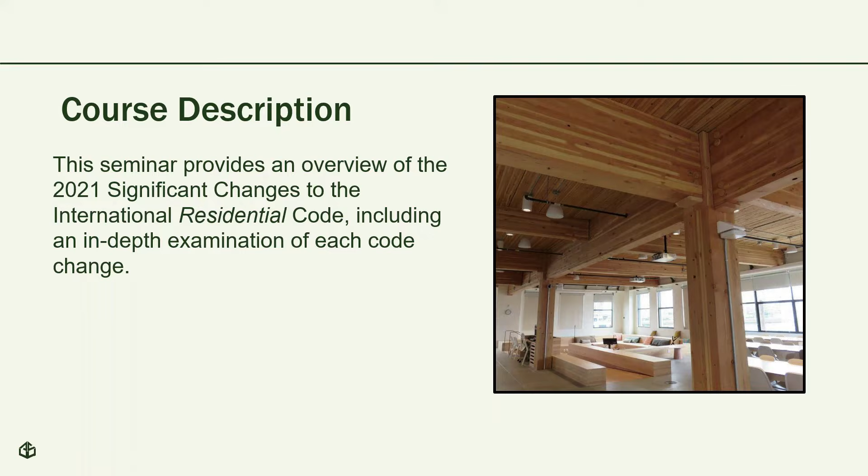Here are the objectives for today. We're going to identify the differences between the 2018 edition of the IRC and what is in front of us for the 2021 edition. I'll try to explain new code concepts, give some of the background, give some of the reason statements for why these code changes were necessary to pop into the International Residential Code. And we're going to summarize certainly the application and impact of these revisions, not the least of which will be those that revolve around the enforcement of this code.

As you saw in my background, I have had the opportunity to enforce the code from time to time, and these particular issues do pop up, and they need to be addressed in the model code. If not, then we have to address them by local adoption. So we have these particular objectives.

Again, the best education opportunity really that we have is to participate in the code development process. You have all of the experts, and there are people that believe they're experts also, in one room at one time, discussing, debating, arguing over various code changes, various ideas that people think need to be in the codes, most of which, frankly, don't make it into the codes themselves.

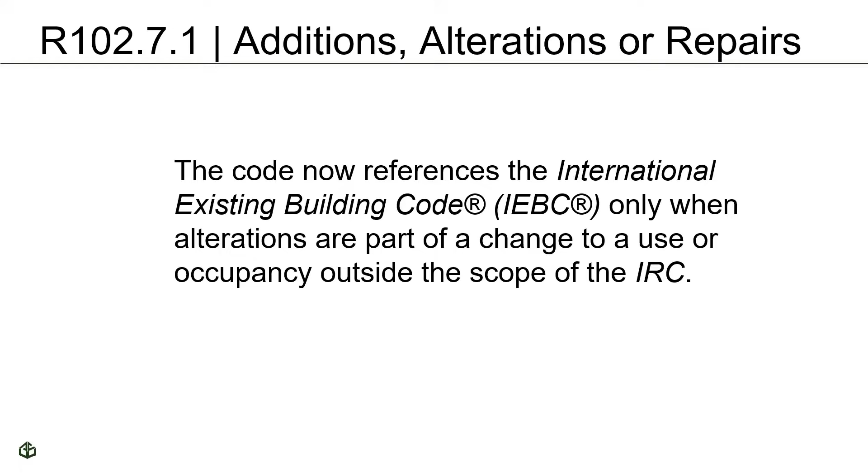We are starting to see in other parts of the country much more use of the IEBC, including now in California. We're going to start to use not just the prescriptive method that's found in that document, but we're going to be able to use the work area method as it will be transcribed into the California version of the IEBC. So this document is gaining more acceptance, and we're moving ahead with the use of that, as well as the IRC.

We made a big jump. We did not include Chapter 2 in this, all of the definitions. There are a number of new definitions that you need to review. We just didn't feel that they were as significant, perhaps, as other types of code changes given the time frame that we have. Chapter 2 is our dictionary, it's our glossary, it's the language we speak.

And we need to understand those terms and use them appropriately so that we can communicate about the projects that we have either under design, that we're reviewing, or if you happen to be a builder, that you're constructing. So you need to understand all of those. Again, you can find at least those that were identified as significant by ICC staff and others in that workbook for the significant changes for the IRC.

This move up to Chapter 3 is a very interesting one. I was a committee member on the residential committee for this one. And actually, a friend of mine submitted this code change on behalf of, I think it was the LA Basin chapter of ICC, to bring in the potential use of shipping containers for residential projects.

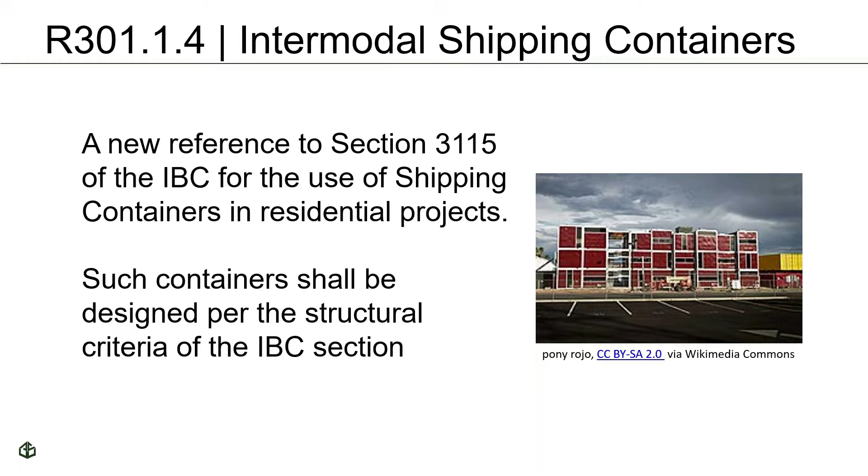Keeping along in section R301, our structural loading criteria for the residential code, we have prescriptive criteria in this section allowing us to use the prescriptive criteria in chapters 4, 5, 6, and so on, describing the various structural elements. When I was the original drafting secretariat for the 2000 edition, we envisioned this criteria in the residential code would be for flat lots, very simple rectangular floor plates, with lots of redundancy in the brace wall panels and brace wall lines.

We've since moved away from that very simplistic approach and included many other conditions so we can use the IRC in these areas. In this case, we're getting into hillside settings. These hillside settings have conditions that allow us to use the prescriptive criteria in setting up the structural framing and support of these projects using the residential code's prescriptive criteria.

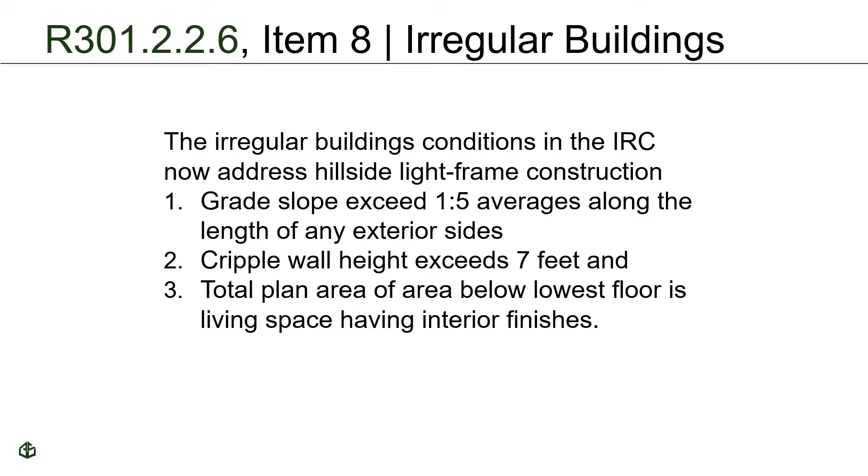We've built in, since the original residential code, many other options—a much more flexible criteria for the use of the residential code, rather than having to find a registered design professional to run structural calculations and prepare structural framing plans. So we have that now. We can use this code in many more conditions, especially since new construction is moving out of the basic flat lot areas. In order to build new dwellings, we're having to move into these hillside areas. So this addresses that.

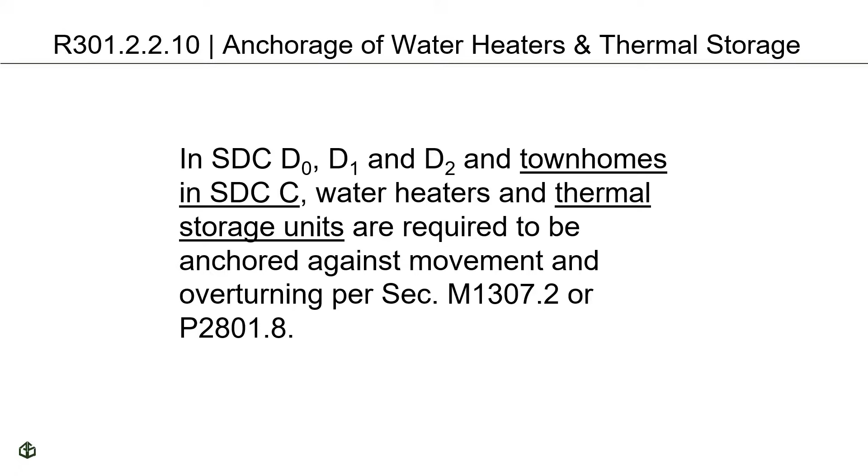We needed to provide a little bit more clarity to the horizontal continuity of the common walls, if you will, between each townhouse unit. In the code, we have to say, and I didn't really think this was necessarily a problem out there, but people pointed out that the code did not say exactly how we would have that horizontal extension or continuity provided when we have non-solid exterior walls, which are probably the bulk of the construction out there for townhouse construction.

So we now say, as a general rule, that these townhouse common walls have to extend to the inside of the exterior sheathing of the exterior wall. So it extends through the concealed space of these walls that are not solid.

We're trying to cut off any potential for fire to leapfrog or just move around these walls to gain access to adjacent dwellings, right? And so we've provided this.

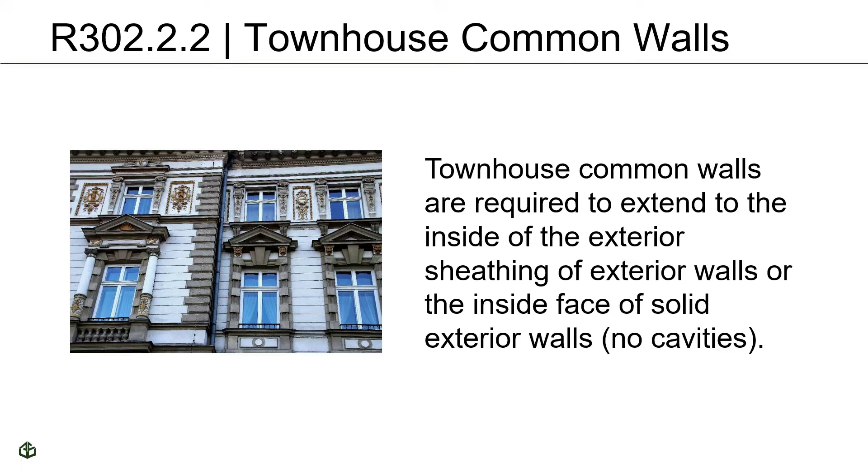With that being said, we provided another exception. Again, I wasn't sure that this was needed, because I kind of believed that when we have this kind of condition, that if you filled that cavity between the common wall and the inside of the exterior sheathing of the exterior wall, if you filled it with, they use the term blocking...

Technically, I don't know that that's exactly the right term, but they fill it completely with solid wood or whatever the fire blocking material happens to be in that concealed space. So we can then end, from a horizontal continuity standpoint, these common walls at the inside of the exterior wall. We don't have to extend them to the inside face of the exterior sheathing of the exterior wall itself.

Very fine detail. We needed to provide that again to meet that goal of completely separating these townhouse units that people live in.

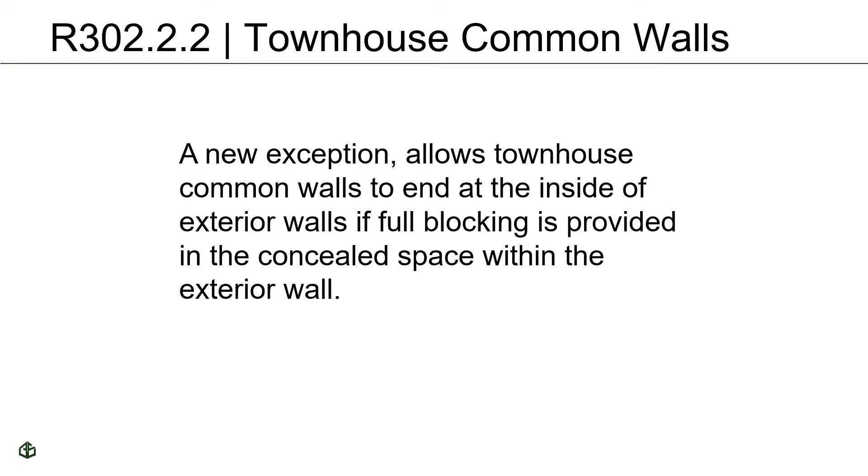This kind of code change tells me, certainly, that we have a pretty good code, actually, in terms of providing the protection that we're looking for, right? And we're just working with the details now and cleaning up areas that are confusing. Very interesting to see this. And certainly we experienced this during the code change hearings as well.

Keeping along those lines, we're moving away from townhouses into duplexes. Obviously, it's 2 units, 2 residential units within a building. Again, I didn't know that this was a problem. In my experience, certainly as a building official, I tried to provide complete separation between these dwelling units to protect the occupants from hazards on the other side.

But we now have, again, a clarification that these dwelling unit separations, these walls, have to be provided whether there's a real lot line or not between each unit. Apparently there was some question when you would have a duplex on a single lot. The code didn't specifically say that you had to have them, and some people thought that these separations only occurred when you had a real property line in between these units.

And so the code is clarifying, certainly the ICC membership has clarified, that these separations shall be provided to provide the protection that we're looking for. So again, very nice clarification. It's part of this theme of just improving the code as we move on into new editions.

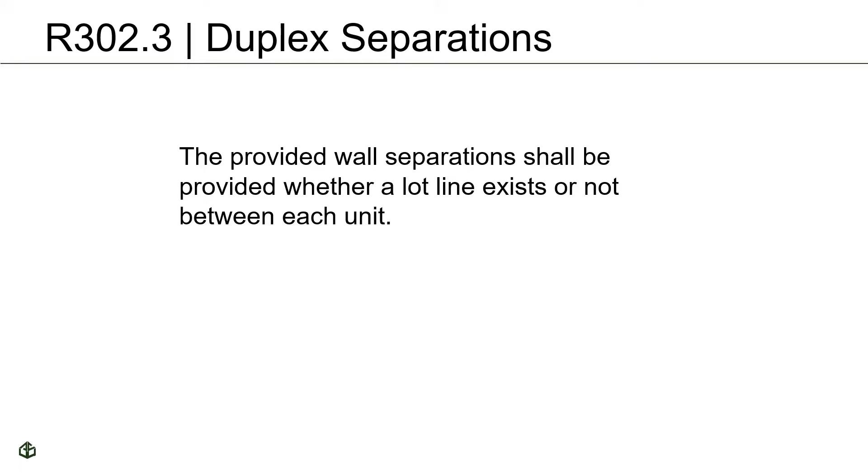Keeping along with that, we're still in section R302. This section really contains everything related to fire resistance. It doesn't have to be fully tested necessarily, but anything related to fire resistance falls into this particular section now. And like we have in the building code, we have through penetration and membrane penetration criteria.

In this particular case, there's an exception that allows for water-filled sprinkler piping as a through penetration through whatever assembly we're looking at, whatever assembly is providing the fire resistance that the code intends to protect the occupants. So water-filled sprinkler piping, obviously the building is presumably fully sprinklered with that, which helps a lot. Also, the annular space created by the hole and the pipe running through it leaves a gap. You can't provide a super tight fit to help prevent the passage of flame and other products of combustion through that assembly, so that gap, that annular space, has to be filled.

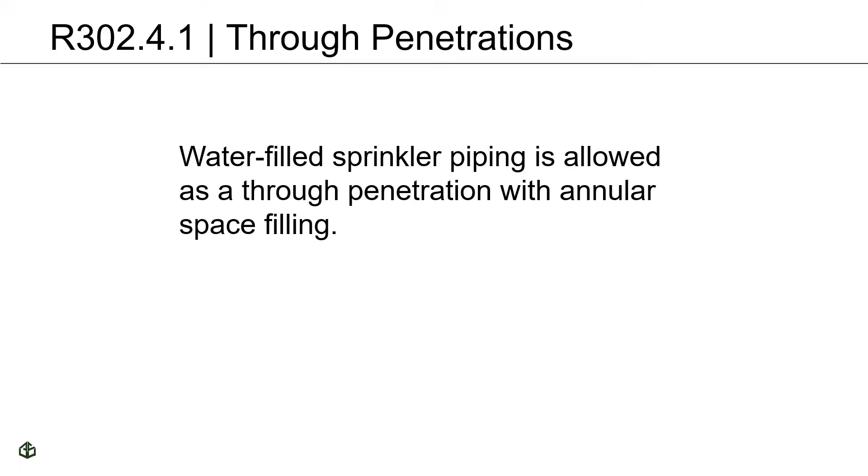That's one of the main things about this, because it's not just flame that is a problem. In the event of fires, it's smoke and other products of combustion that could be a problem for occupants on the other side. So we give them an opportunity to get out by providing these fire resistive assemblies with protected openings and penetration protection. Water-filled sprinkler piping to me is kind of a no-brainer because, for one, the building is fully sprinklered at that point.

And along those lines, membrane penetration—previously in the 2018 code, and the terminology is a little wonky here, sprinkler heads were allowed to be a membrane penetration so long as they had a metal escutcheon plate that covered up that annular space so other products of combustion couldn't pass through. Well, we've also included as a membrane penetration the water-filled sprinkler piping as well. Again, if we have that penetration occurring, we want to protect the annular space; in this case, it allows for a metal escutcheon plate.

With this water-filled piping or the sprinkler head, you're going to have a fully sprinklered condition. As such, assuming the sprinkler system is properly designed and installed, the sprinkler head is going to control the fire until the fire authorities come in and really suppress it—in most cases it might even suppress the fire itself. But we now have the ability to have these sprinkler pipes go through and actually serve the dwelling without necessarily having the more expensive penetration fire stopping systems.

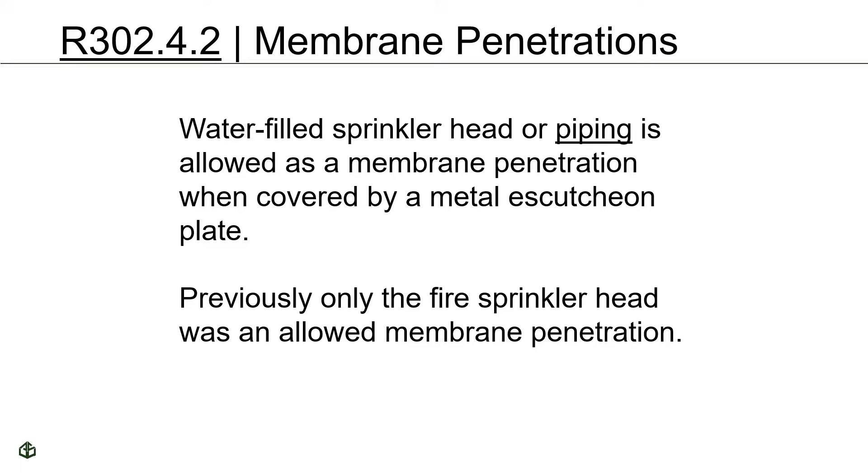There has been a lot of work in section R302, and as I mentioned before, a lot of its details. This one has been a very, very interesting one to follow over the years.

The 2000 edition of the International Residential Code basically had a door—it did not have to be self-closing, did not have to have a lock or a latch, and the like. We've gone through several editions since then, and all of that criteria has come back, including now the requirement for a self-latching door. So when the door closes, you have a little latch that goes into whatever that plate is called and latches, holding the door in place in the event of a fire on either the garage side or the dwelling side.

Historically, fire loss data shows that most fires start in kitchens; there are some that start in garages. So we have this separation requirement between the garage and the dwelling that's provided. In fact, some of us at least believe we're protecting the garage from fires in the dwelling. But we have the ability now to provide a completely protected opening in this garage-dwelling separation.

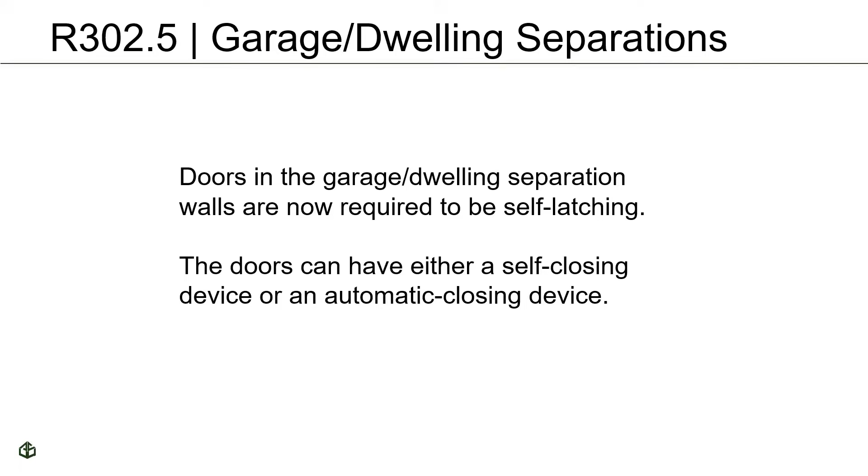This is a pretty simple code change, and it is kind of a no-brainer, but it has its own challenges, I think. High-density polyethylene, we get some of these plastics, polypropylene as well. They are showing up as interior finish types of products. They do test these to make sure that they are not producing an inordinate amount of smoke or making the fire spread a lot faster than it should. I get that, and in new construction, certainly, or in additions and all of that, I understand.

We see this particular product pop up periodically, and it really is a very simple note that occurs in the general sheet of notes more than anything else for the interior finish criteria.

Well, that's great. Challenge I have is that there is work that is done, believe it or not, without permits. I know that might be a shock to a lot of you, but it does happen. And homeowners, I am a homeowner myself, have a tendency to run to a big box store and pick up various products and then attempt to at least, or maybe completely install them over a weekend.

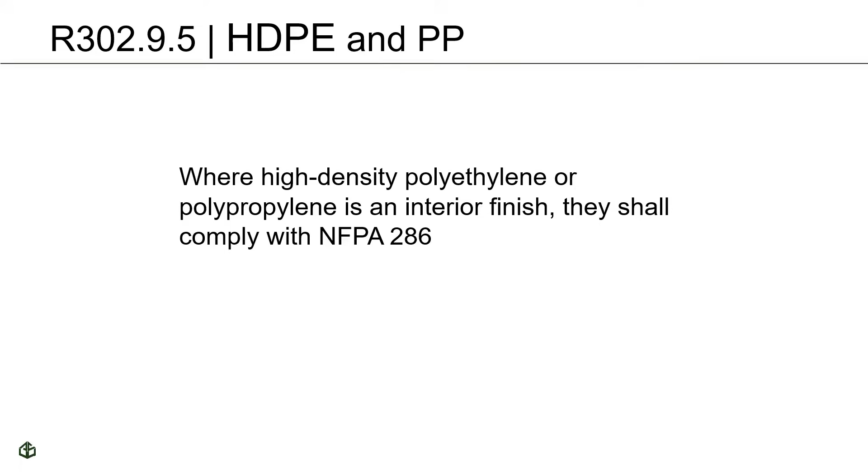Okay, R303. We've moved into an area that is part of our housing, if you will, types of regulations that have been built into the residential code. Effectively, the general rule is we have natural light and natural ventilation, right? We have windows that are openable, that kind of a thing. There's been a whole list of exceptions for both over the years.

This is a new one. This allows in kitchens only the use of a local exhaust system in lieu of actually providing exterior openings to provide natural ventilation. People have told me that certainly in section chapter 15 for the mechanical criteria, we're really looking at maybe range hoods or other types of very specifically local exhaust systems that can take the place of the natural ventilation in these kitchens.

Okay, a lot of kitchens are open to other rooms and they can have the benefit of whatever system. Maybe it's a whole house fan, or they have openable windows and things of that nature that can allow for the ventilation we're looking for. But in those cases where we don't, this can be a very handy tool.

Okay, I probably would not have allowed for this system prior to this if I were the building official of a local jurisdiction. I would have wanted either the whole house fan or certainly openable windows in these kitchens to provide the ventilation that the code is looking for, but we have this now. So it's a very handy code change.

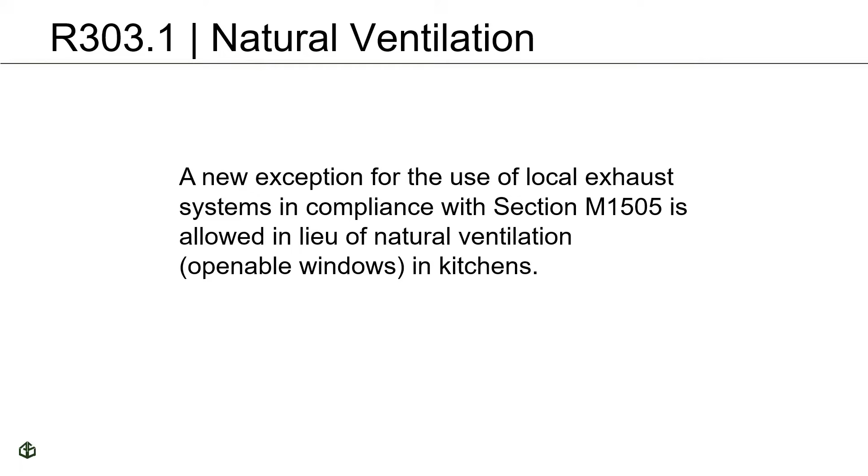We're getting quite a few exceptions, in this case, to both the natural light and natural ventilation requirements. I think it makes it much easier to design and build in certainly urban areas. If we're in a very rural area with lots of land and rambling one-story types of dwellings, that hasn't necessarily been a problem. But when we get into those tighter, more densely populated conditions, sometimes we have to come up with unique ways to provide the ventilation and light we're looking for.

Keeping along with some of our housing criteria, the ceiling height. We have a list of exceptions for that. I don't know that I've seen anybody attempt, in brand new from the ground up construction, ceiling height less than the minimum required by the IRC. I see this particular exception being utilized in the conversion of basements, conversion of attics, conversion of other types of areas into residential spaces.

This allows for ceiling beams, so long as there's a 3-foot clear span between the beams themselves, to project down to 6'6" above the floor level. This particular picture shows it's a lot higher than that, at least to me. I am, or at least I was, 6'4", so this is something that is near and dear to my heart, or near and dear to my head.

We get very concerned when we have these kinds of projections into these areas, but it is a very effective tool to use for existing conditions and the conversion of those existing conditions. So we have that now built into the code, and it's very handy to utilize these spaces moving into the future and get them permitted and safe, and not just converted illegally.

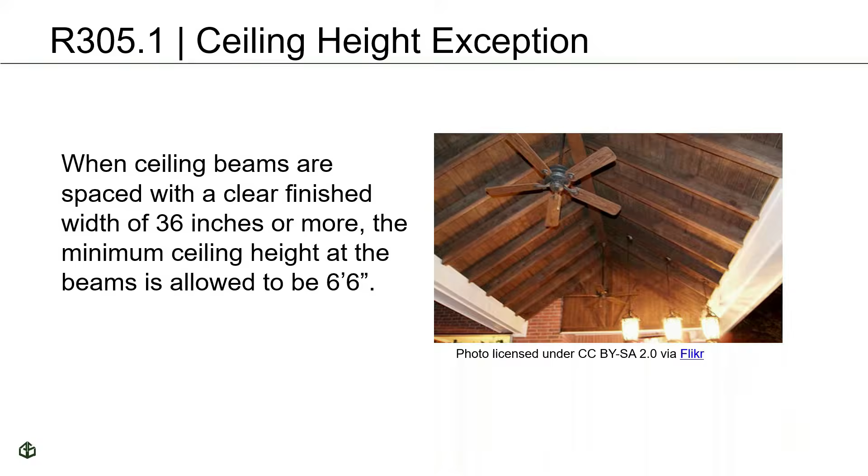EERO. EERO, these are our emergency escape and rescue openings. It's a very unique kind of acronym. But we've had a lot of changes over the years to the conditions where we have these types of openings and how we provide the spacing, where they're located, that kind of thing.

This particular section, R310.2.4, talks about these openings that are found under decks, porches, and cantilevers of the floor above. So what this does is it says that if you should have a bedroom, maybe one room in a basement, perhaps could be an upper story, but for the most part these are really trying to address basement conditions or sloping lot conditions. And it says that the opening itself shall be fully openable.

Okay, we get that. And then this is the only time it talks about this pathway away from the emergency escape and rescue opening. It talks about the path being not less than 36 inches high by 36 inches wide and ultimately leading to a yard or a court, which would take you ultimately to the public way, which is the place of safety, if you will, in the code.

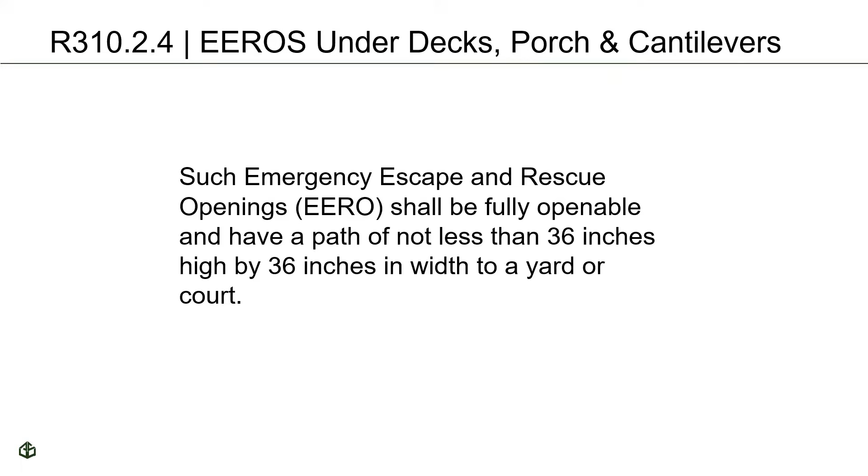Section R310, we've had some changes here. We're still in the emergency escape and rescue opening. If you look at the title, it says alterations or repairs of existing buildings. We had the very first slide that talked about the use of the International Existing Building Code. Again, that's very limited. I get that. But we now have existing building criteria built into the residential code.

The residential code, like the building code itself, was intended originally for new construction, and then existing work would be covered by the IEBC, the existing building code. We now have criteria that is coordinated with the existing building code in the residential code, because frankly, not many people have been using the IEBC, certainly for residential construction, single family dwellings and duplexes and the like.

So when we have a change of occupancy, and that does occur in single family dwellings, duplexes, and even in townhomes, we can evaluate these emergency escape and rescue openings to see if they conform to at least a very nominal sized opening as an EERO, right? And you can see the criteria here. The opening area itself, as a minimum, is 4 square feet in opening. Obviously, you can see the height of 22 inches and the clear width of 20 inches as well.

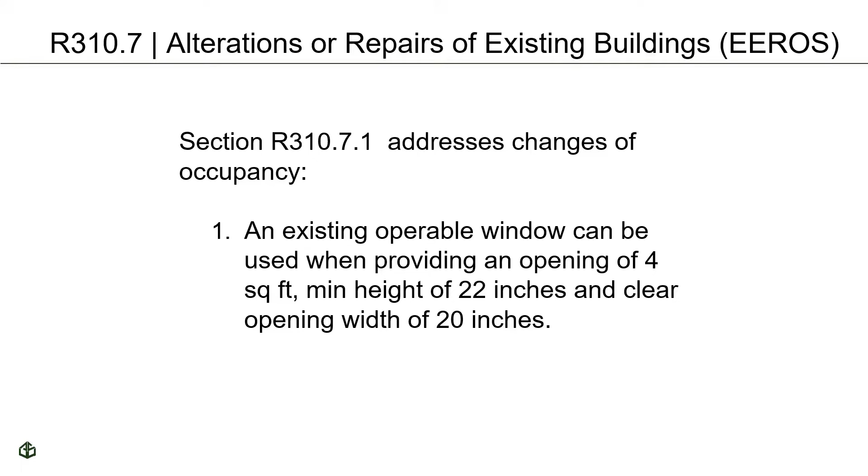So we're actually kind of whittling down, if you want to look at it that way, the size of these openings in our existing building stock that was built maybe prior to, in a lot of cases, the development of the International Residential Code or even any code in a particular area. So we can use some of these without having to effect changes in the existing building that may not necessarily be that necessary.

Moving on along, we have another exception. This is one that's a little bit weird to me. Okay, we still have the same opening dimensions as we just talked about, the 4 square feet, the 22 inches high, 20 inches wide, that kind of a thing. And then it says it is the largest window from a given window manufacturer that fits, obviously, and is operable and provides the same or greater dimensions as the existing.

Okay, so there's a lot more to look at in this case. When we actually get permit applications for replacement windows, just being honest, we're going to actually have to ask if they want to use this exception, what manufacturer they're using, and we're going to have to ask for a listing of the windows and then evaluate what's the largest window that they provide that would fit this particular opening without altering the rough opening.

It actually creates a little more, no, not a little more, a lot more complication, I think, for our counter staff, because frankly, a lot of our retrofit window permit activity is handled at the counters.

Okay, we have a lot more to do with emergency escape and rescue openings now, and we've got more at the end of this particular session today that relate to those windows that we have to evaluate. So sorry about that. I was on the committee. I don't remember how I voted because it's probably been about 5 years ago now, maybe more than that, since we actually met on these items.

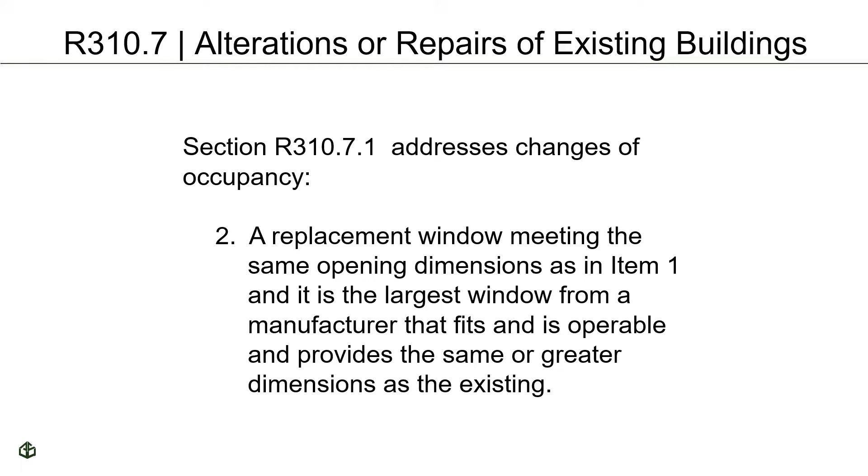But I have some concerns with this particular one, and mostly with educating our counter staff and those that review plans at the counters, depending on your jurisdiction, if you're on the enforcement side. It's going to be very interesting for retrofit window types of permit activity moving on. Just seems like every cycle it is.

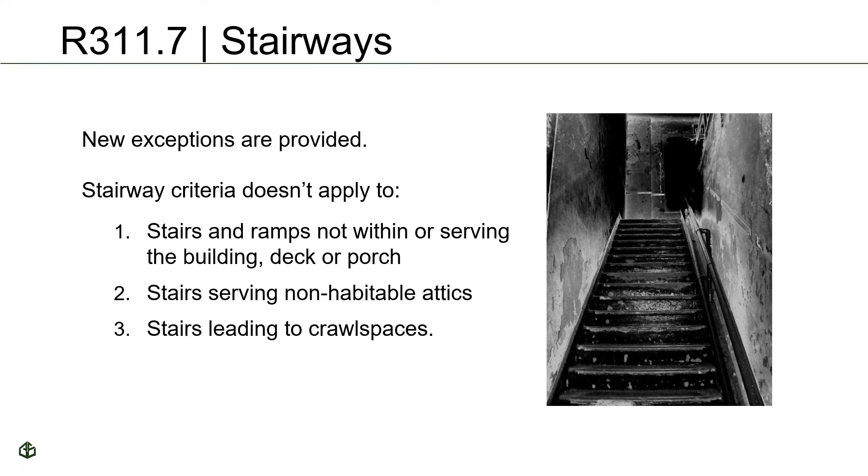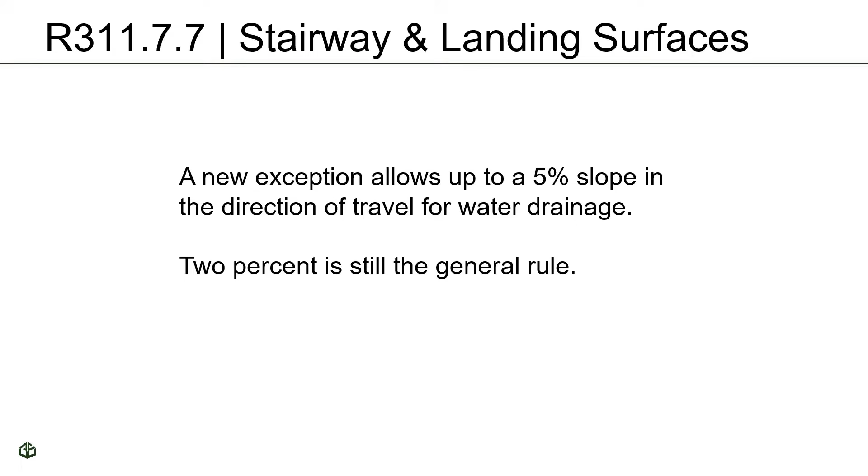2% is still the general rule for the slope. However, if you need to provide a greater slope, you can go up to 5% in the direction of travel only to make sure that water drains from the landing surfaces in particular and on the stairways, because we know that people do slip based on moisture. Okay, so that's in the code now.

Here's the ramp criteria. We've already talked about this. At least I haven't seen many ramps leading up to second stories or whatever within dwellings. I suppose they could, but certainly ramps that are not within or serving a building, deck, or porch, obviously, take a look at this. This is going to be an interesting one moving forward for all of our enforcement communities, but certainly the building officials.

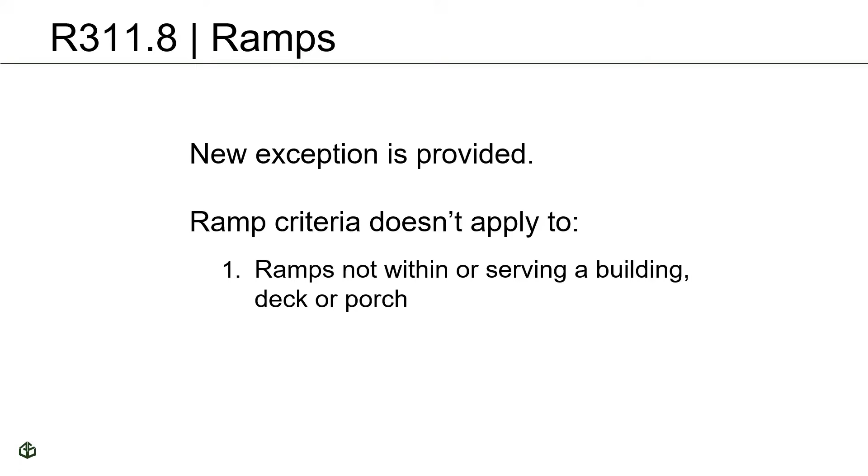Location of smoke alarms. Okay, we effectively have a general rule that provides that they're in each bedroom, hallways serving the bedrooms on each story, that kind of a thing. Okay, now when we have perhaps a great room or a room with a vaulted ceiling that is adjacent to a hall that opens to that particular room, and the maximum ceiling height difference is greater than 24 inches, then we get a smoke alarm in that, if you will, vaulted ceiling as well.

Because what will happen is if there's a fire that is in that vaulted room or in an area or space, maybe the kitchen, that is adjacent to that vaulted ceiling, the smoke is going to fill up that vaulted area first before it gets itself to the hallway to actually actuate the smoke alarm and cause the occupants to egress or control the fire, right? So we've added this particular location in the code so that we get it in these particular cases, and we get the notification that we are looking for the occupants to actually egress out.

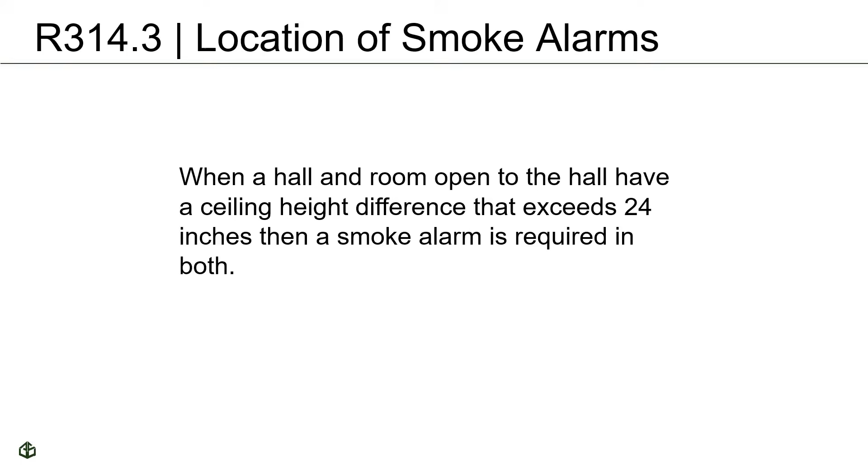Carbon monoxide alarms. We get a lot of these too. This is relatively new, it's been in the code for a few editions, I get it. But initially we didn't have any sort of carbon monoxide alarm detection, anything like that. We've got that now. We now have an exception that allows for us to not require the installation of carbon monoxide alarms, again, in existing buildings, when there's some sort of installation, alteration, or repair, as said here, of non-fuel fired systems.

So obviously, fuel gas systems get them. We're very interested in particular with fuel gas systems, but if we have some other type of fuel that is being consumed, that is being burned or otherwise utilized in one of these systems, okay, then we're going to ask for carbon monoxide alarms to be installed.

Interesting thing about this, and smoke alarms too, we're getting them installed based on, in certain parts of the country, based on the resale of property, based on all kinds of regulations out there now. The smoke alarm criteria is frankly the number one life-saving element that we have ever built into the codes. It has saved more lives than anything else we've provided, even sprinklers, because smoke is the ultimate killer. You don't have to have a raging fire to have smoke.

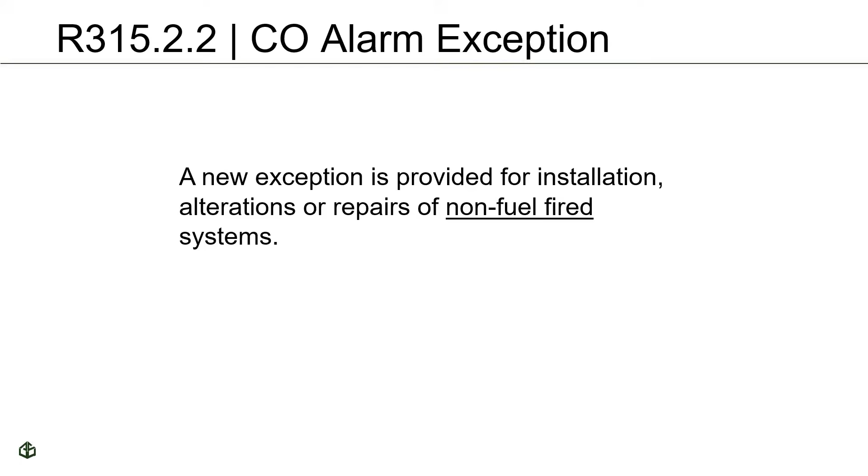Okay, so here we have another exception. Certainly, if you're doing counter work and somebody's coming in pulling a permit, we're going to have to ask what type of system is going in or what are you repairing. If it is electrical only, we can say okay, no smoke alarm, no carbon monoxide alarm, you're good to go. If it is fuel gas fired, we have to include that in our inspections, because it's very difficult to do that at the counter. When you go out to conduct your inspection, you may have to ask for the install of a smoke alarm or carbon monoxide alarm in particular in this case. Hopefully we're educating our contractors out there to do this as well.

Okay, we made a pretty good jump. We've moved into the protection of wood against decay, obviously from moisture types of conditions. They have clarified this criteria, simplified it. They removed the condition where if the building official should happen to know that they don't have these conditions, they can waive it. I don't know of any place that doesn't have these conditions, to be honest, so they kind of pulled that out.

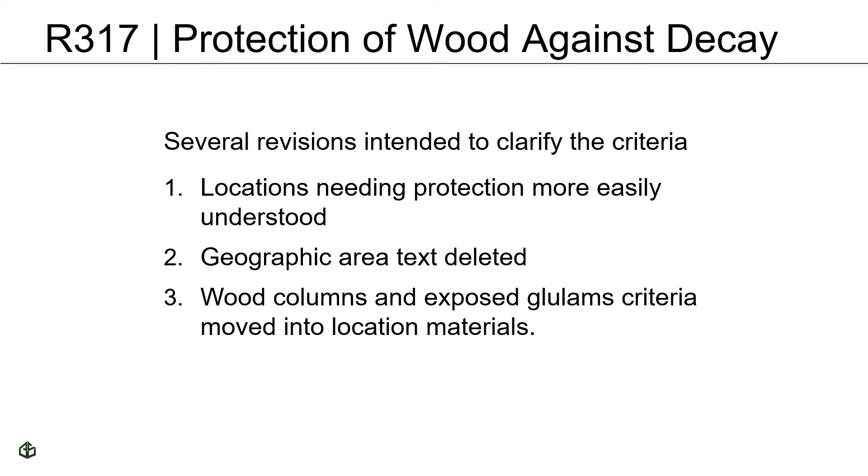We're going to talk a little bit about wood columns here in the next slide, and exposed glulams - it's just been all simplified, and it's much easier to use. Again, this I think may have been an American Wood Council, or at least certainly a wood industry type of code change, and it's been a very helpful simplification of the criteria, because we did used to get a lot of questions when I was serving as building official about the application of this criteria.

Here's the wood columns. You can see that they've made it much more specific. You can see we have three items listed here: one is crawl spaces, the other is in contact basically with concrete, that kind of thing, or masonry, I suppose. A lot of these are pretty basic. They've again simplified this, made it much simpler to understand and to use. I really do appreciate that, and certainly all the work that goes into trying to address all of the issues in making a simplification to, frankly, a fairly old set of criteria.

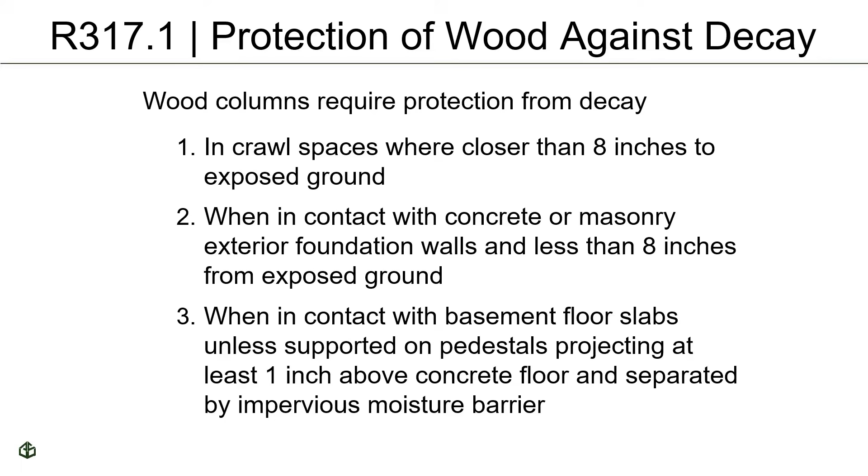Accessibility. This continues to be a very interesting topic. Obviously, we're talking about the live-work units in this particular case, and we're concerned about the application of Chapter 11 to this criteria based on the work area of the dwelling. And we clarify, we make very specific that 1108.6.2.1, as it says here, applies in this particular case, but the non-residential portion itself is actually covered in Chapter 5 of the IBC. So we have effectively references back to the IBC when we get four or more units that are being built, that kind of thing, live work types of units.

And we're seeing those more and more in our urban types of settings, not so much in the suburbs, but downtown areas where they're trying to encourage people to come back downtown and revitalize those areas. We're seeing these live work types of systems or facilities pop up. So it's been a good thing to have this here. In other parts of the country, they may amend this one degree or another. Always take a look if you have a multiple unit project, take a look at what you've got in front of you in your locality anyway.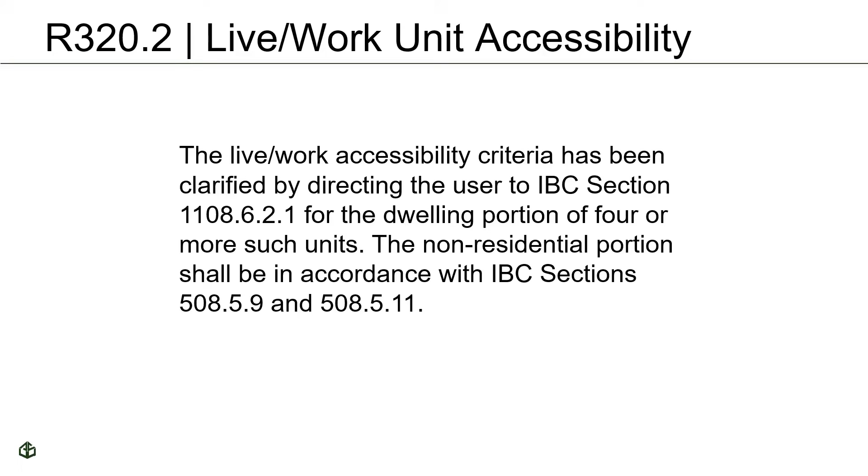Photovoltaic. It's been a huge move to incorporate PV or photovoltaic types of systems. The mounting system now has a listing and labeling. UL 2703 is the standard that is used to provide the testing of these systems. It really is criteria for the mounting systems themselves. And as with pretty much every system that's out there, they are installed in accordance with the manufacturer's listing and instructions - that's actually part of the listing. So it almost doesn't need to be said, except that we have to be clear that we need those installation instructions out in the field when we're conducting our inspections.

So that's built into the code here. We have building integrated photovoltaic types of products out there. Right now, the most common ones are photovoltaic roof shingles. When we have those and somebody is trying to use this particular product, how do you provide the separation? How do you identify that this area is the photovoltaic shingle versus other areas that may not be? In most cases, I've seen the entire roof covered. So how do you not provide the ventilation areas, and for larger residential systems, the pathways and setbacks?

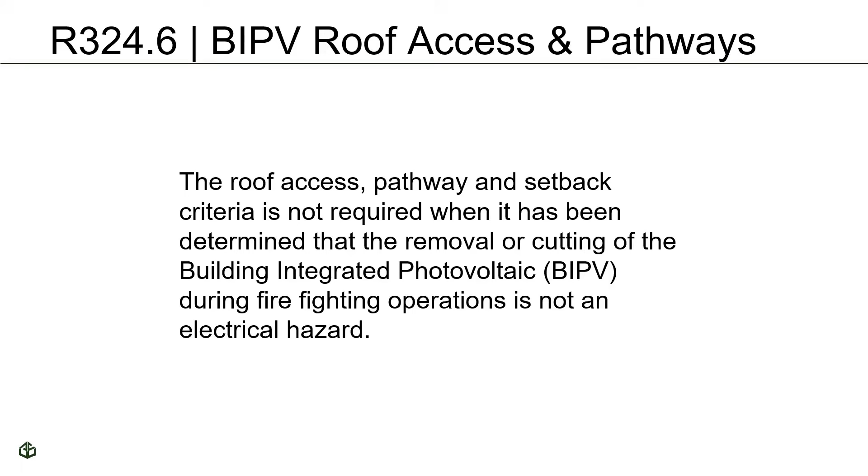The building official has to be shown that the removal or cutting of these types of products during firefighting operations is not an electrical hazard. There's always a very slight electrical hazard at least, but it's pulled back so far that it really is more like a low voltage system when they put the photovoltaic system in that mode. So they can pull it back and it will just be a very light electrical feeling, like we have with our low voltage systems, and that can be used to cover the entire roof without providing the ridge separations and access ways from the eaves. Now, we also have a concern when you have maybe a multi-story building with emergency escape and rescue openings. We were talking about this earlier, right?

And we have these photovoltaic roof shingles applied in total across that roof area. You're not supposed to jump out of the window and land on a photovoltaic module, certainly, but we have the same determination in this case as in the previous slide. The listing, the NEC section number, is listed there. Section 690 is all things photovoltaic, but 690.12 B2 is where we find that. We can have these types of photovoltaic shingles directly below these emergency escape and rescue openings. You don't have to have the 3-foot pathway provided to the emergency escape and rescue opening.

The challenge, or at least some of the pushback that has occurred, although they've pulled back quite a bit, is that pretty much all of these roof shingle products with photovoltaic capacity get slick when they get wet. But what was found is that other roofing materials like slate or metal roofing shingles, when they get wet, also get slick. So until the roofing industry can figure out how to address that - and there are roofing associations out there very concerned with everything related to their product - until they can come up with a solution, we have that now. Certainly the occupants trying to make an escape during a fire, or the firefighters trying to effect rescues, are going to have to be very careful with those.

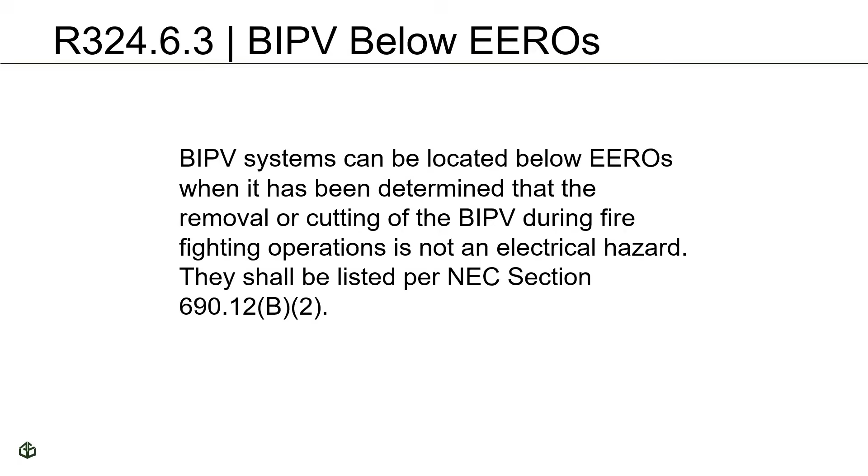Habitable attics - this criteria has been built into its own section, okay? And there are some interesting things included that are more descriptive, I think, than anything else. But for habitable attics, there's still a limitation on floor area based on whether it's sprinklered or not. Non-sprinklered is 1/3 of the area of the story below. Sprinklered is 1/2 of the area.

Certainly, and I find item number 4 interesting - I'll skip around here. HA is habitable attic, by the way. A habitable attic above a 3rd story in a sprinklered building can be there. Basically it says that if you have a non-sprinklered building, it can't be there effectively. And we do know that there are many parts of the country that do not require sprinklers installed in dwellings, and that would affect that. The funny ones are the 2nd and 3rd - we get that the occupiable space is bounded by the roof assembly, the sloping rafters or trusses or whatever is in there, and the floor assembly we get, and then it says knee wall. Well, I've seen conditions where they didn't provide a small knee wall, but okay, maybe it's blocking or whatever - it's just a very small knee wall and all that.

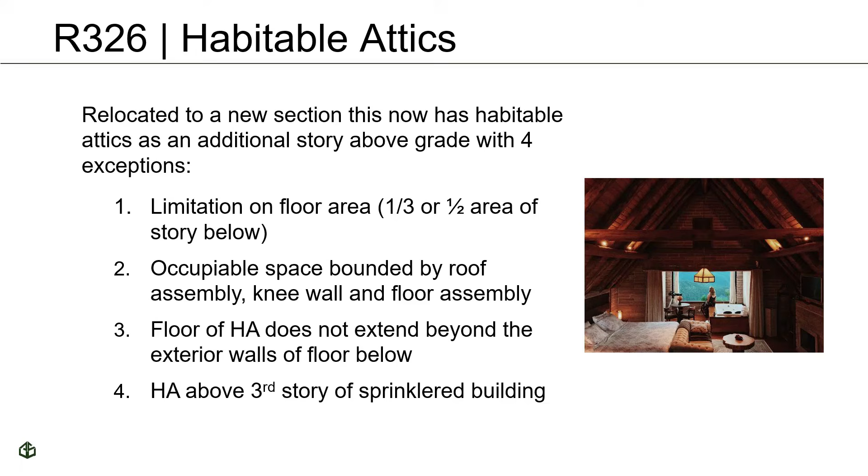Energy storage systems - we're getting towards the end of today's session. A lot of work on these, even more so than the photovoltaic now. The photovoltaic has had their time. They've worked quite a bit on the criteria related to those that would go into the building codes themselves, including the residential code. The batteries, how we store the energy that is generated, has been a big concern.

UL 9540 is the standard that is applied to these. We get that they're listed and labeled like so many other products. We get they're installed per the manufacturer's installation instructions. Then we have other criteria that is imposed, almost like amendments to a degree, although I think a lot of the manufacturers use these too.

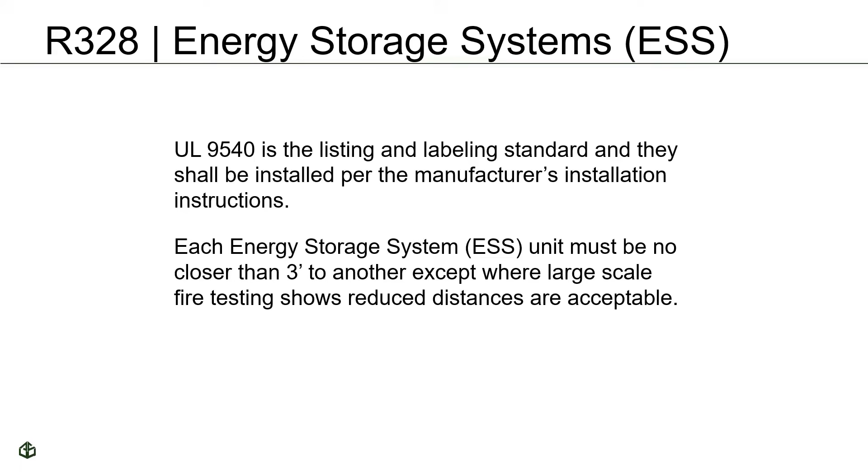Each of the units must be no closer than 3 feet to another such ESS unit, unless there's been large-scale fire testing. We get that - again, it's like an alternate. They provide you with testing that's specifically intended for that particular product, maybe in that particular configuration, and then you can evaluate it. And I would work certainly much more closely with the fire department on this, because they're the ones who have to respond to these fires. And if it gets in runaway mode, it's very difficult to respond and certainly to suppress. They can control it, but the criteria built into the codes is intended to limit the exposure to the fire hazard based on these systems.

We have the locations addressed here, the acceptable locations of these battery-like products. Detached structures, garages, accessory buildings, whatever - you can have them there because obviously they're not as highly occupied as you would find with the regular dwelling unit. Attached garages, so long as they're provided with the garage-dwelling unit separation that we've already talked about today.

Outdoors on exterior walls, so long as there's a 3-foot gap to any opening. Obviously there's an inherent fire resistance for all products - even gasoline-soaked rags, I suppose, could have some sort of fire resistance, albeit very short. But that basically allows for and considers that in allowing for them to be anywhere on the outside of the building. Obviously zoning or planners are going to have a problem if they're in the front yard or side yard, but please make sure that they're properly separated.

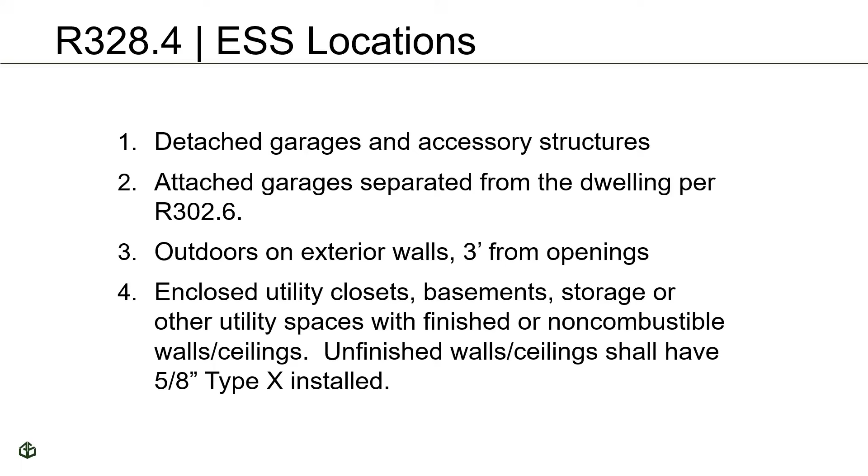And then if you go into any sort of enclosed space, obviously we get the 5/8 type X, or we get non-combustible. We get non-combustible types of products that enclose these particular units, again, to give a little bit of time for the occupants to escape.

It's kind of an interesting thing that we have to say this, but we do actually say where they're not allowed. And it's obvious that we don't allow them in sleeping rooms or in other types of spaces that open directly into sleeping rooms. It's amazing what people will do, certainly when they really aren't knowledgeable about codes. They're not knowledgeable about the fire hazards. And so one of the great things about this particular industry is that they're also very concerned about the installation, the application of these products. And so they don't encourage that. They want to have qualified people who are knowledgeable actually doing the installations themselves.

Now, we do have fire protection that's provided with that. Anytime you have ESS installed, we get smoke alarms. So if they go into a problem mode, if you will, then hopefully the smoke alarms will detect that and then cause the occupants to leave, or certainly suppress or control the fire as much as possible.

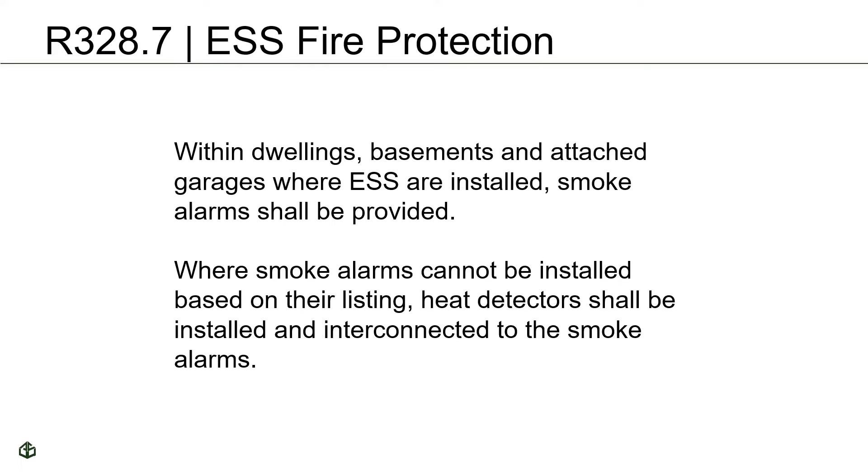So that's one of the challenges with the installation of these battery types of systems, these energy storage systems. Now there's another challenge: we have to protect these batteries, these systems, from impact. The IRC just says approved barriers shall be used. The industry, in developing amendments for the state of California, has come up with a very handy diagram that's actually in the California Residential Code that details the installation requirements for these energy storage systems, and certainly the protection features built in too.